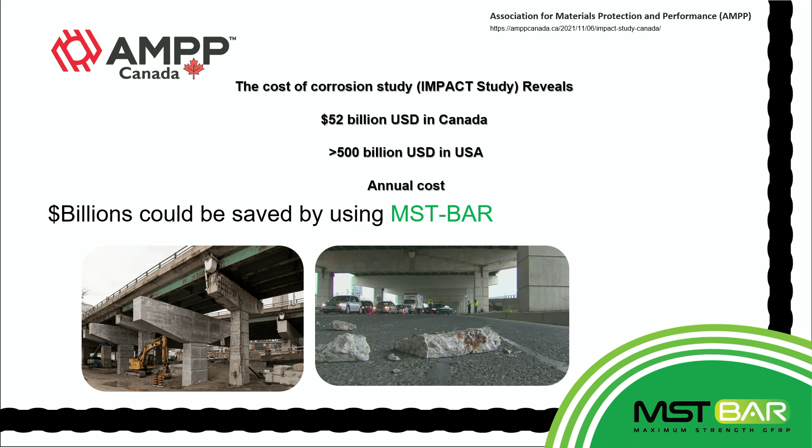I just literally got here late last night, so I haven't spent a lot of time traveling around Trinidad. But in every country I've ever been to, you see constant examples of concrete degradation.

Basically, when concrete starts to corrode, it expands. When steel rebar starts to corrode, it expands and breaks and spalls the concrete. There's an example here on the bottom. We're in Florida, where in 2021, a tragic accident happened where an entire condo building collapsed because seawater got into the foundation. There wasn't proper maintenance done as well, but the entire building collapsed, and that's strictly from corrosion of steel rebar.

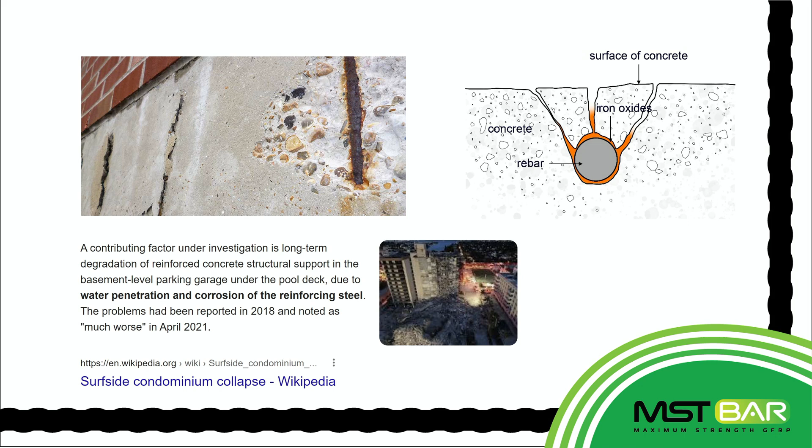So here's endless examples. These are products, these are structures that are designed for 100 years, last less than 50 years, and more importantly, start to corrode after 8 years. And the thing that happens is that you have these design lives of 50, 100 years, but built into that there's a ton of maintenance and a lot of maintenance costs.

And when you use MST bar, the products, the structures will last for hundreds of years with zero maintenance. The maintenance budget is only, for example on bridges, sometimes you have to replace the lines on the road, but there is no concrete degradation.

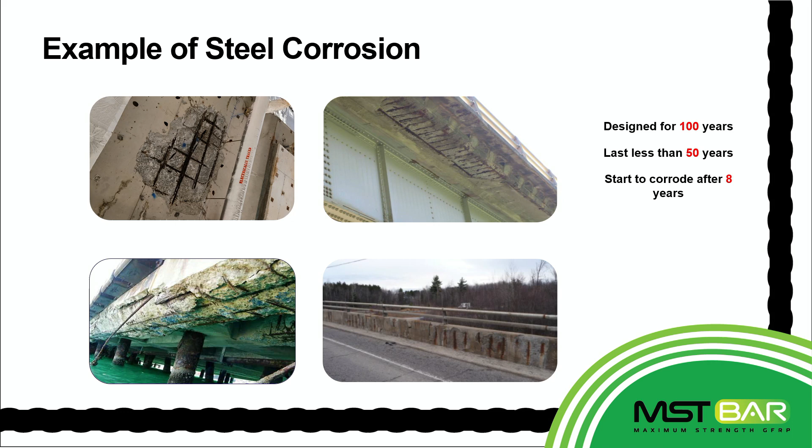So these are, I can go on for a long time, but these are just endless examples here. This is an important one. So this is basically an evolution of rebar, basically reinforcement.

So basically, black steel rebar was invented in the 1920s. And post, after the Second World War, there was obviously a ton of construction everywhere. And 50 years later, in the 70s, people realized, oh my goodness, all this concrete structures that we made with steel rebar are starting to fall apart. They're starting to corrode, and this is costing us billions and trillions of dollars.

So the first thing that happened in the 70s was the advent of galvanized rebar, epoxy-coated rebar, and then some stainless steel rebar. And the next evolution in the 1980s, the mid-80s, was fiberglass rebar. So this is something that's been around since it's almost 40 years now.

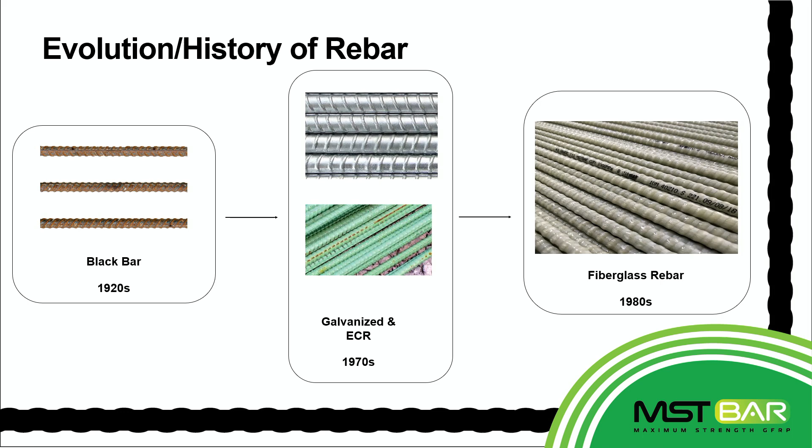And basically, what you have here is there's always some arguments whether it's the concrete issue or the steel rebar issue. But when you look back thousands of years ago, and I saw the gentleman previously had some concrete structures in England, rebar has only been used since the 1920s. So all the old structures that are mainly built in Europe, thousands of years ago in Rome, a lot of them are still standing because they were just basically built with concrete and not with steel rebar.

But back then, it was extremely inefficient to design concrete structures without rebar, but they were still built, and a lot of them are still standing. And you see here on the right, this structure that was built in year 2000 in North America with steel rebar is already falling apart.

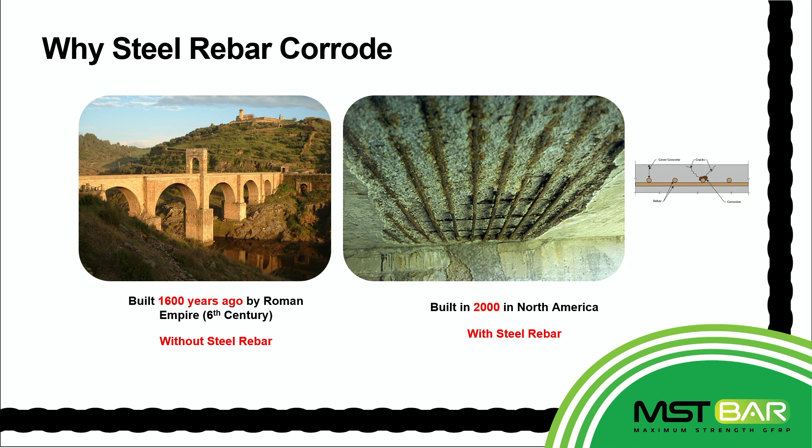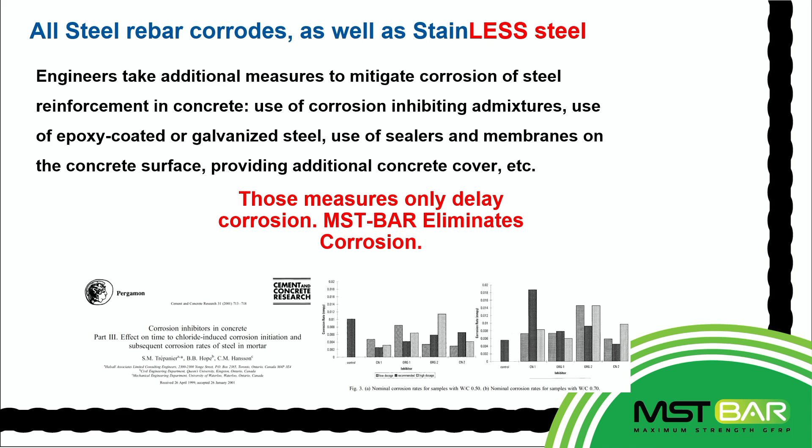So basically, all steel rebar corrodes. It's just that stainless steel rebar corrodes less than black steel rebar. There's all sorts of other things you can do to slow the corrosion. You can use very expensive corrosion inhibitors. You can use vapor barriers. You can galvanize the bar. But all that does is just slow down the corrosion and add a lot of cost.

So one of the reasons is, if this has been around for 40 years and we're starting to see basically exponential growth in the last 5 or 10 years, why is that? What happened? So these are the reasons why there's been this incredible growth in the last 10 years.

The first is basically the first two combined there. Overall, anywhere in the world that we've been involved in, the construction industry is relatively slow to adapt to new materials. It's a very conservative industry. People don't want to take risks because you're building large structures. So people are hesitant to work with a new material.

There's a high risk of doing that. But this isn't new anymore. This top section here, the first bridge in the United States was built in 1986 in Virginia. I'm not sure if you've been to that part of the States, but it's a very high snow area, a lot of road salt, and that was built as a test case.

So this isn't new anymore. That bridge now is almost 38 years old, and it's been checked every year. In 2020, they took out core samples of that bridge, and after 34 years, there was zero degradation. The only thing they've done on that bridge literally is replace the yellow line after that long. For any bridge in a snow area with road salt, it's really unheard of. So there's not really the argument that it's a new product anymore, because it really isn't.

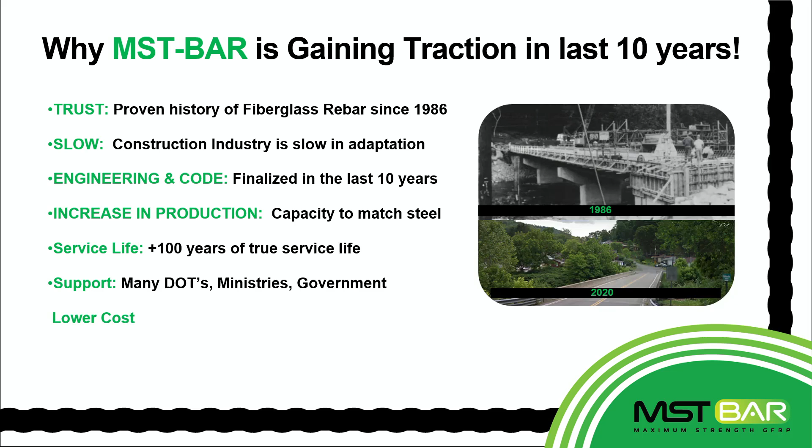And the last one, the most important one, is now it's actually lower cost than using steel rebar. Not over the lifetime, but the initial cost is significantly lower using MST Bar than using steel rebar. That's something a lot of people don't realize, but that's actually the case, and that's why it's really growing quite quickly.

So these are all the benefits. The first one, obviously, is the corrosion resistance. You get hundreds of years of service life with no maintenance, and you don't require any corrosion inhibitors or vapor barriers, because those are strictly there to protect steel rebar. The other thing is the weight. This weighs a quarter that of steel, so the placing time and cost is about half that of steel rebar.

I'll show you some videos later on, and I want to make sure I'm not cutting into the coffee break at all.

But this makes a huge effect on cost. Also, the bond strength to concrete is 3 times that of steel, so there's no anchoring required. You don't need any bent bars for anchoring when you're using this. It's very easy to cut, no special tools required. And this is an interesting one: the fire rating, through ASTM E119, is actually 50% better than steel. A lot of people think it's a composite, a plastic, so there's going to be fire issues, but it actually is better. And I'm more than happy to share.

We have literally a mountain of third-party test data of all of these things that I'm talking about here. If any of you have any questions, please let me know, and I can send it to you as well. The strength: this is 3 times stronger than steel in tensile strength. Fatigue strength is 20 times that of steel, so this works very well in high seismic applications as well.

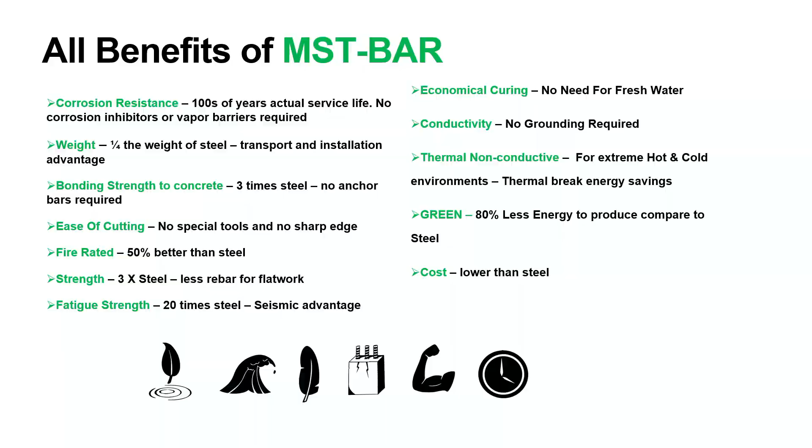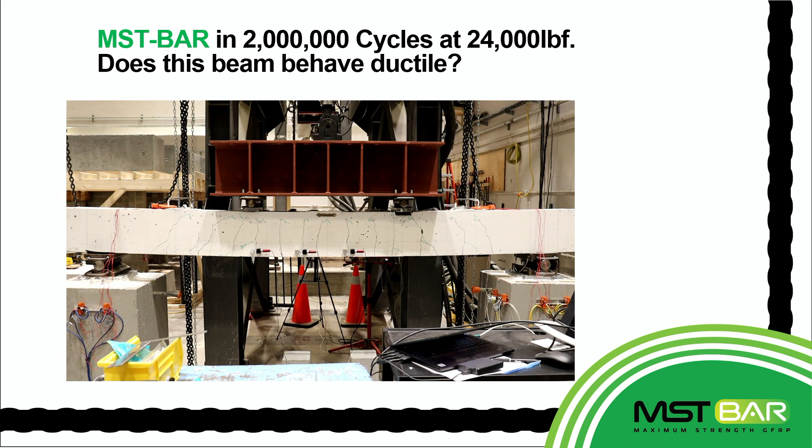So this is just an example. There's going to be a lot afterwards. I've done engineering lunch and learn presentations probably 200 or 300 times, and the ductility question always comes up. This is a video. I'm not sure if the video will work on here or not. Oh, here we go. So this is just showing, when you talk about ductility, what kind of movement you get in the structure.

A little bit about MST bar. We have a 200,000 square foot plant in Toronto. As I mentioned, we've been tripling every year. Our next expansion will be in the U.S. After that, we're expanding with a plant in Australia, and then after that, we have a plant in the Middle East going in as well. So this is very active because we're starting out from a very small amount. Even though we produce 500 kilometers a day, we're still probably less than 1% of the total rebar use in the U.S., but every year it's growing.

So everything's developed, designed, and manufactured in North America right now. We're exporting around the world. We're the largest pultruder, the largest manufacturer of fiberglass rebar in the world right now. We've produced about 1 billion feet of rebar, and we have about 20,000 fairly large projects completed in North America. For current capacity, you can talk about kilometers per year or per day, and our 2024 capacity, which we're in right now, is up to 127,000 kilometers.

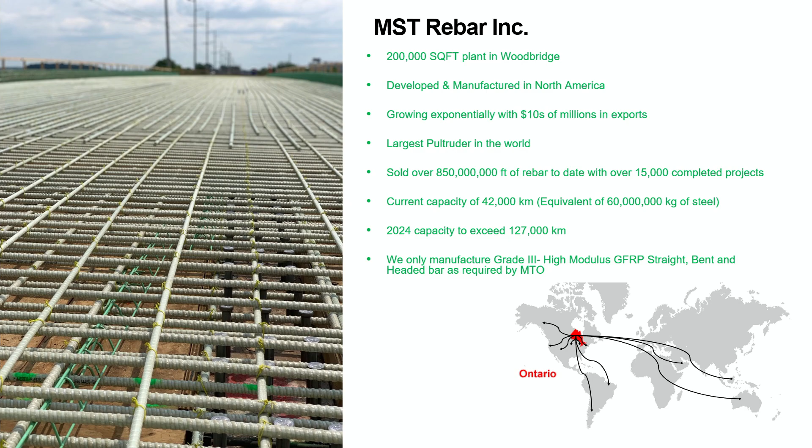From a design point of view, I'm not sure which software all of you use here. We've been working with Altair, which is the largest concrete design company in the world. Their product is called S-Concrete and S-Line, and they actually have a specific module just for MST bar.

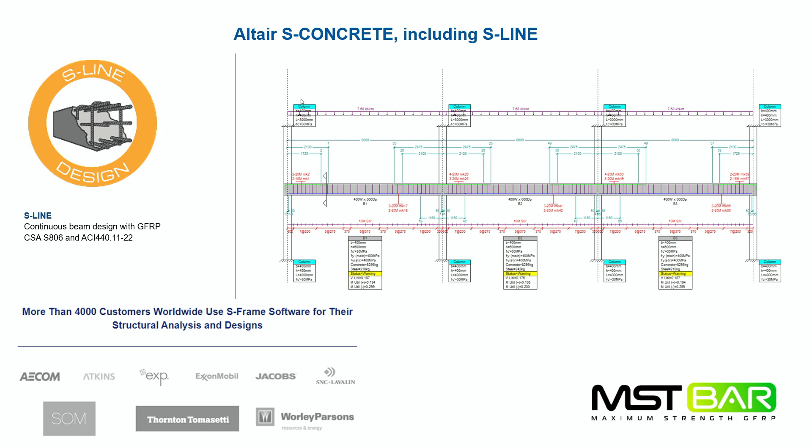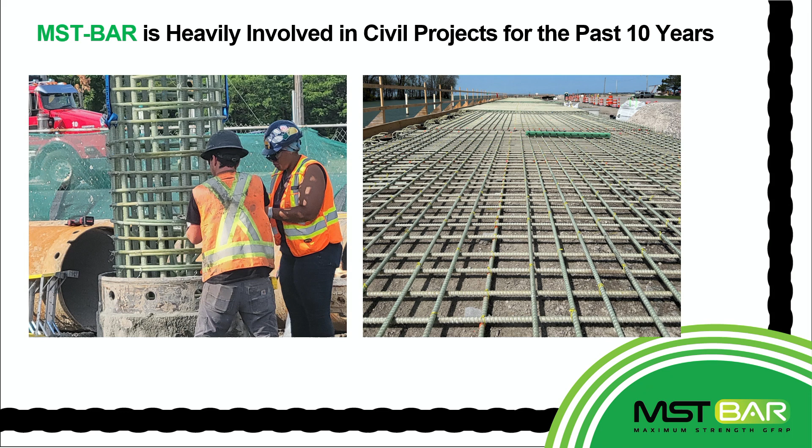We have a lot of different examples of projects that we've done. On the left-hand side, quite an interesting one here, is piling. We have a caisson design that's very technically effective and also very commercially effective for piles. On the right-hand side is a pier in Ohio, the Port Clinton Pier. These are the caissons that we make.

We manufacture those at our plant, but also, because we'd be shipping here in shipping containers, we can make spiral shapes for the outer caisson, and they can be fabricated here as well.

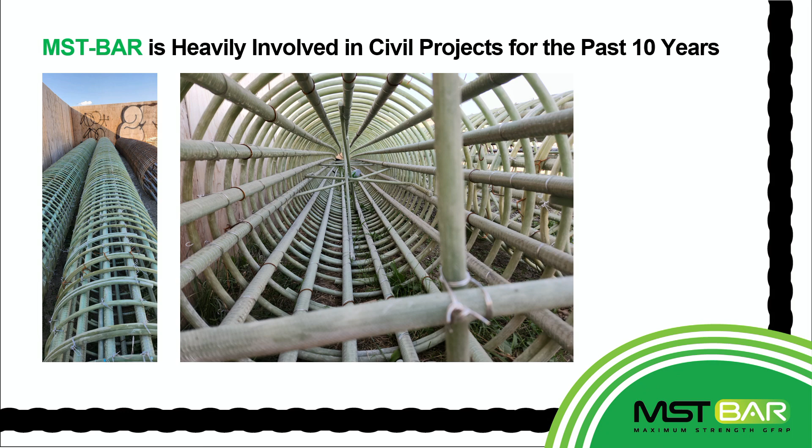This is an interesting project in Ontario, Canada. This is the first bridge in North America that has no steel rebar in it at all. Typically, in all countries that we've worked in, everybody, rightly so, wants to start out slow. So where we typically start out is with flat work bars, slab on grade work, then progress as the engineering community, the contractors and the owners feel more comfortable, then we progress further into that.

So with bridges, typically the guardrails were the first ones that were started. Then people get into decks. This is the first bridge that has no steel rebar in it at all. All the girders, the columns, everything is 100% MST bar. And this was made cost effectively compared to steel.

It's expected to last well over 100 years. It came in under budget. It was locally made, obviously, in Ontario. But it was actually delivered much faster than steel. So from a design point of view, because our capacity is so high, the steel rebar would have actually been delayed, and this was done ahead of schedule, and a lighter bridge with less injury as well.

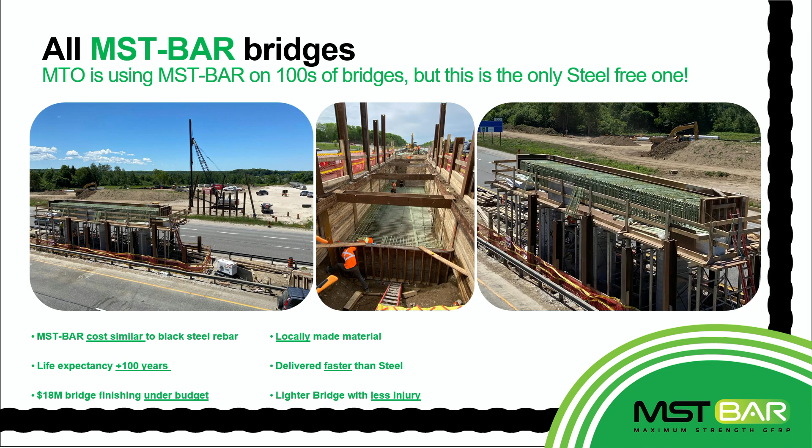Because there was, I have a video here, I think, this is just showing other examples of it. No, the video will come later on. Could you put, oh, I have to do it here? Hold on. Oh, here we go.

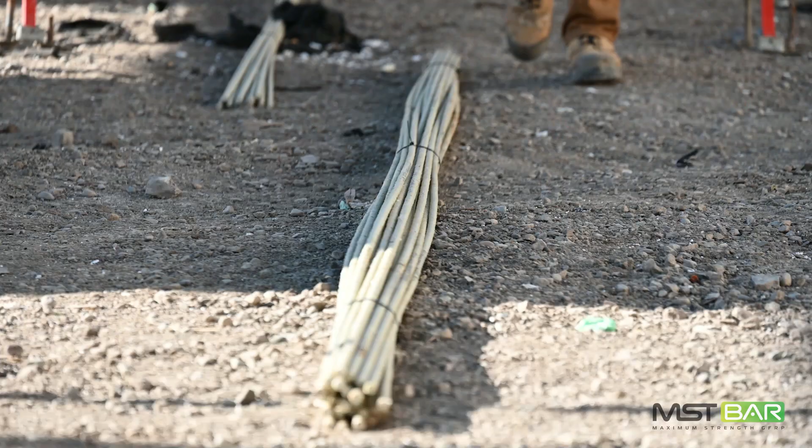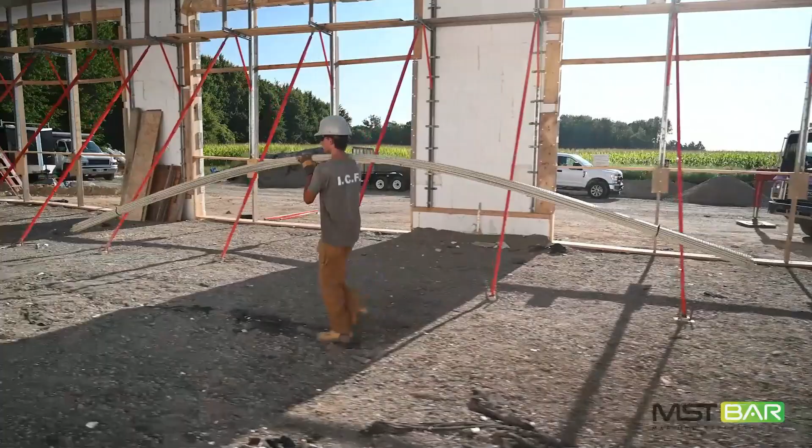This is actually a residential construction video showing basically how you can carry this around. This is something called an insulated concrete form. I'm not sure if this is used in Trinidad. But this skinny little kid here is carrying around a bundle of 25 bars. Is ICF, or insulated concrete forms, used in Trinidad?

Yeah, okay. So this is something where we're probably covering in North America right now about 25% of the rebar used in ICF homes. Because it's so cost-effective, and technically when you're putting in the vertical bars and trying to do that with steel, there's no comparison between using MST and steel.

This is just another example, quite a corrosive application in the farming community in Western Canada. This is kind of a gross application, but it's for animal waste. This is about a 100 meter diameter animal waste tank. That's about 10 meters high as well.

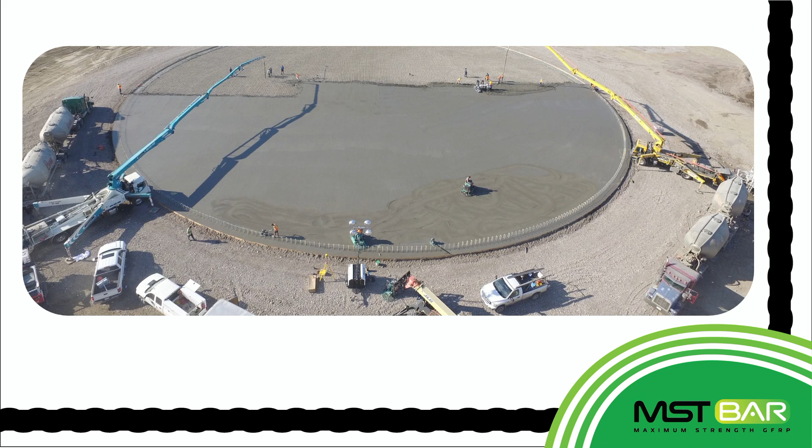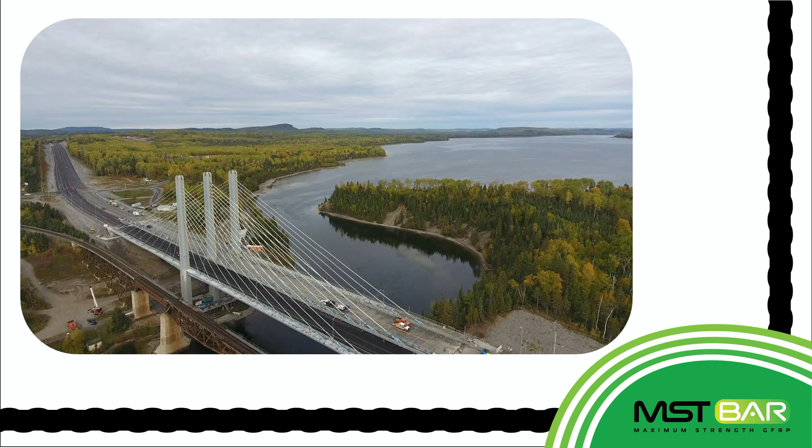These are other examples of bridges. We do precast and cast-in-place bridges as well. This is a bridge, and it's almost like a tourism ad for Northern Ontario. This is Nipigon, Ontario. And this is showing the cast-in-place and precast as well.

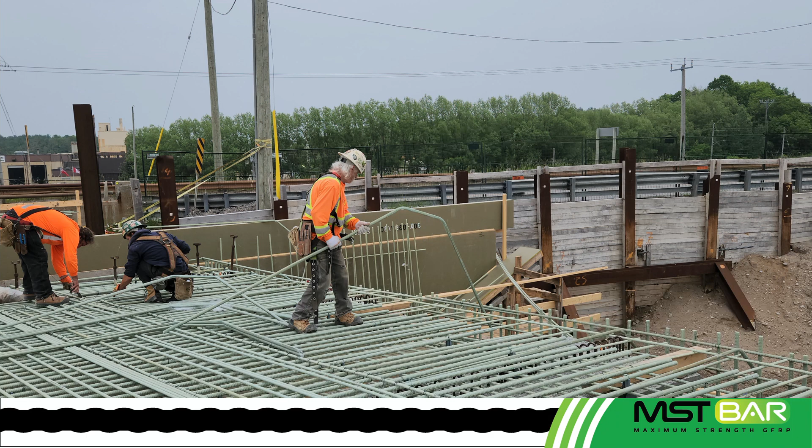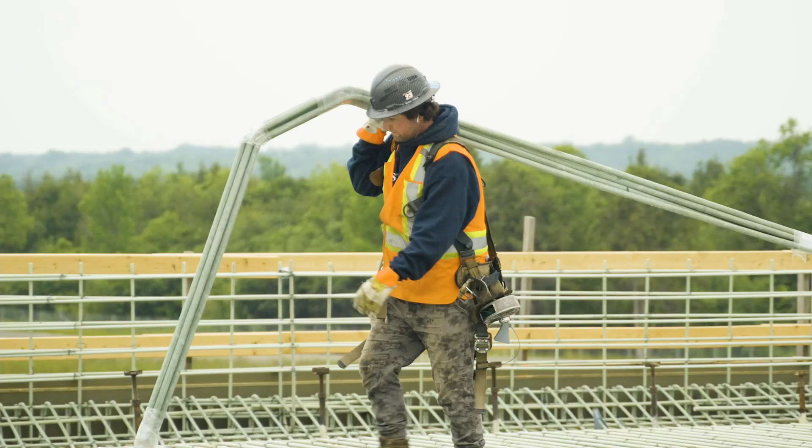I think one of these is a video coming up. This is the bridge, the 100% MST bridge that I was just talking about before. This is the video. So when you talk about placing time being half that of steel, this shows how and why that is.

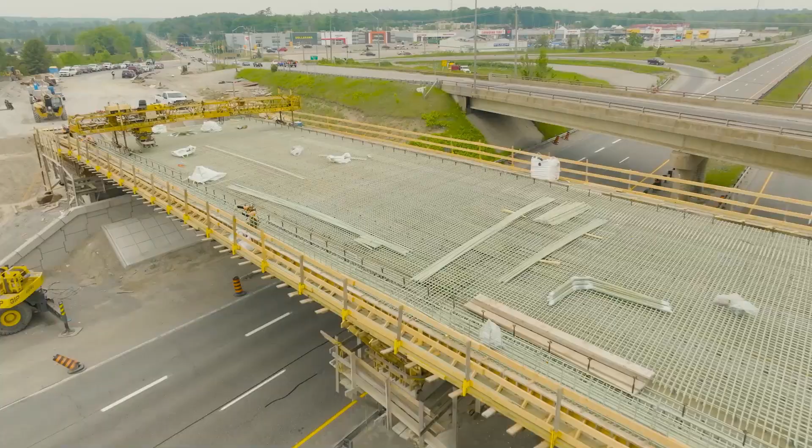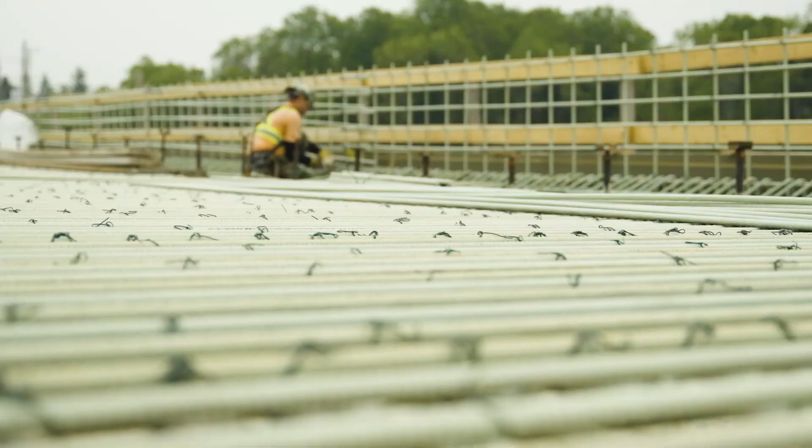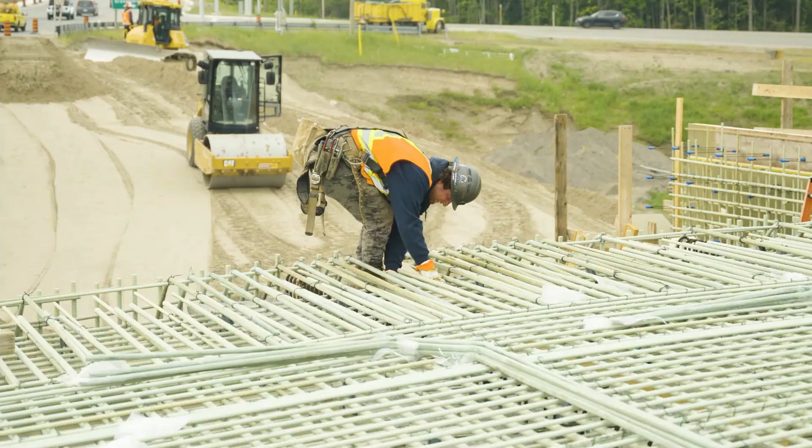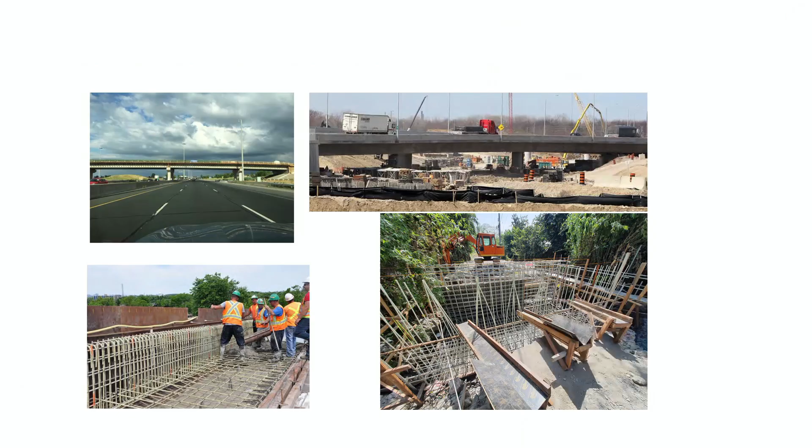Can I ask you a question? Sure. And some of your pictures might help. The first question is going to be from, I'm sure, the contractors in the room and the engineers. Working on site, obviously, we can see that it's lighter to carry around. But with traditional reinforcement, we'd have steel benders on site, bring the steel and bend it to shape, to cage. This can't quite do that in the same way, right? Correct.

That's a great question. So once this is made in a straight bar, it's made with a thermoset resin. So at the present time, I should say, you can't bend this. We're working on a bendable bar, but it's not commercialized yet. So for all the bent bars, there's a long-winded answer to that question.

For the bent bars, we manufacture them. I don't have a sample here, but I'll show you samples of bent bar. It's basically a separate process. We can make bent bars in any shape, but a lot of bent bars are used basically for cages.

Well, for cages, but also with steel rebar you need 90-degree bends so it's solid into the concrete. With steel rebar, the bond strength to concrete actually isn't that high because of the ribs. When the concrete surrounds a steel rebar and the rebar is under tension, it'll tend to neck down, change shape slightly and pull out.